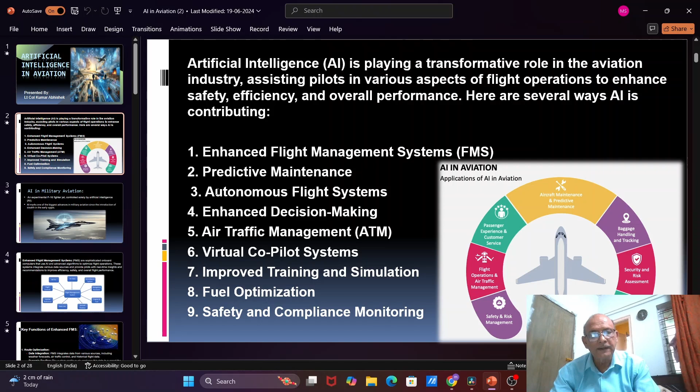Enhanced flight management systems, predictive maintenance, autonomous flight systems, enhanced decision making, air traffic management, virtual co-pilot systems, improved training and simulation, fuel optimization, safety and compliance monitoring.

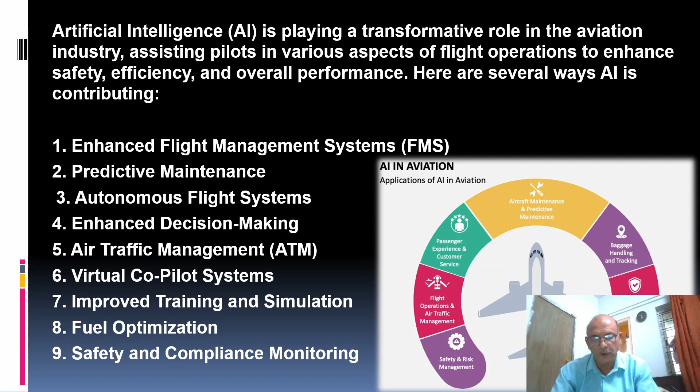AI in military aviation. An experimental F-16 fighter jet controlled solely by artificial intelligence. AI marks one of the biggest advances in military aviation since the introduction of stealth in the early 1990s.

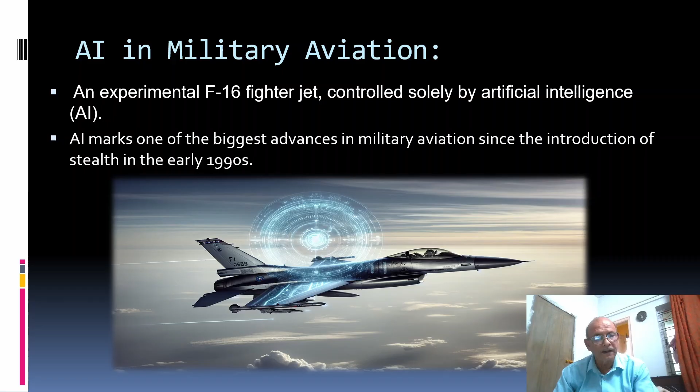Enhanced flight management systems are sophisticated onboard computers that use AI and advanced algorithms to optimize flight operations. These systems integrate various data sources and provide pilots with real-time insights and recommendations to improve efficiency, safety, and overall flight performance.

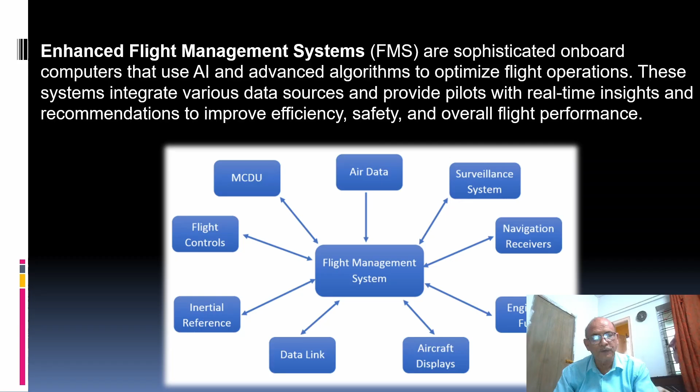Key functions of enhanced FMS: route optimization, data integration. FMS integrate data from various sources including weather forecast, air traffic control, and historical flight data. Dynamic routing: the system continuously analyzes this data to suggest the most efficient flight path, adjusting to factors like wind patterns, turbulence, and air traffic.

If a storm develops along the planned route, the FMS can suggest an alternative path that avoids the adverse weather, ensuring a smoother and safer flight.

Fuel management, consumption analysis. FMS monitors fuel usage in real time and compares it with expected consumption. Optimization: it suggests optimal speeds, altitudes, and configurations to minimize fuel burn.

For example, during a long haul flight, the FMS might recommend a slight altitude change to take advantage of favorable jet streams, reducing fuel consumption. Performance monitoring.

System health: FMS continuously monitors the performance of aircraft systems and components. Predictive alerts: it provides predictive maintenance alerts if it detects any anomalies or potential issues. If the system detects unusual engine vibrations, it can alert the crew and suggest a maintenance check upon landing, preventing potential in-flight failures.

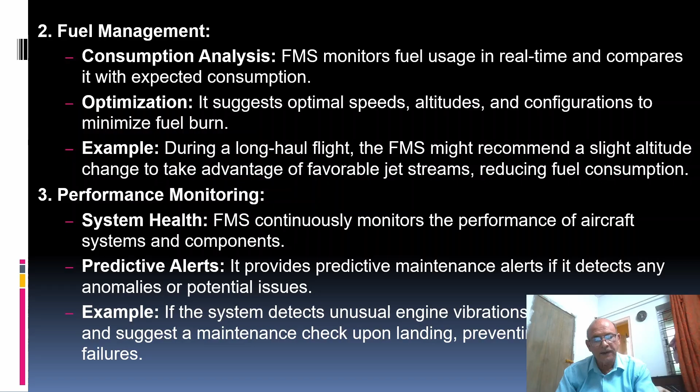Navigation. Accurate positioning: enhanced FMS can use GPS and other navigation aids to provide precise positioning and navigation guidance. Terrain awareness: it includes terrain mapping and awareness functions to help pilots avoid obstacles. For example, in mountainous regions, the FMS can provide visual and audio alerts if the aircraft gets too close to the terrain, helping to prevent controlled flight into terrain incidents.

Communication data link. FMS facilitates communication between the aircraft and ground stations, sharing flight data and receiving updates. Automation: it can automate certain communications such as position reports, reducing pilot workload.

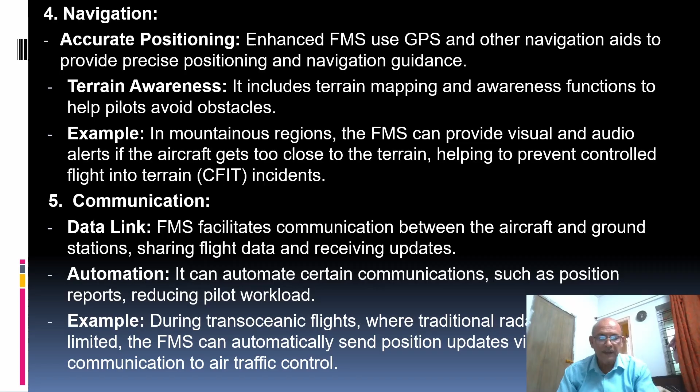During transoceanic flights where traditional radar coverage is limited, the FMS can automatically send position updates via satellite communication to air traffic control.

Example scenario: transatlantic flight optimization. Imagine an airline operating a transatlantic flight from New York to London. Here is how an enhanced FMS would optimize this flight.

Pre-flight planning. The FMS assesses the latest weather data, including forecasts for the North Atlantic, and integrates this with historical data on winds and jet streams. It suggests an optimal route that maximizes tailwind benefits, potentially reducing flight time by leveraging the strongest jet streams.

In-flight adjustment. During the flight, the FMS continuously monitors weather patterns and air traffic. If it detects that the planned route will encounter turbulence or significant headwinds, it suggests a new path. The system advises the pilots to adjust their altitude to avoid turbulence and maintain fuel efficiency, for instance climbing to a higher altitude where the air is smoother and the winds are more favorable.

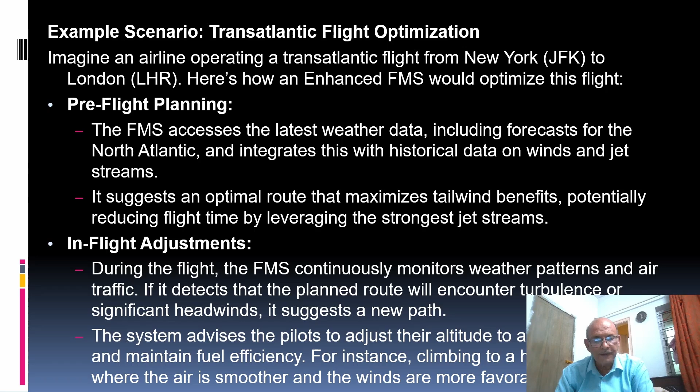Fuel management. The FMS tracks real-time fuel consumption and compares it with expected usage. If it detects higher than expected fuel burn, it recommends adjustments in speed or altitude. It also provides real-time updates on remaining fuel, ensuring that the aircraft remains within safe operational limits and can make any necessary adjustments to reach the destination or an alternate airport.

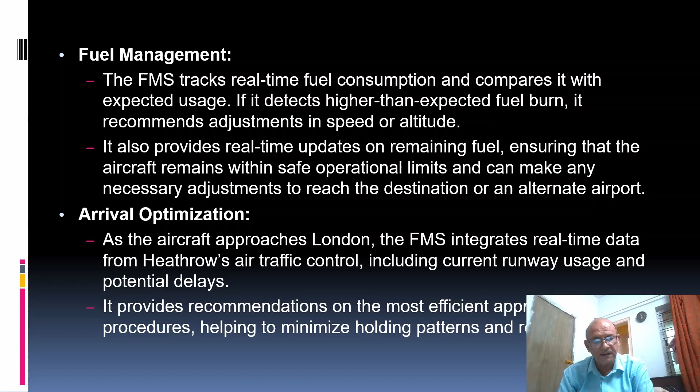Arrival optimization. As the aircraft approaches London, the FMS integrates real-time data from Heathrow air traffic control, including current runway usage and potential delays. It provides recommendations on the most efficient approach and landing procedure, helping to minimize holding patterns and reduce delays.

Efficiency: by optimizing routes and fuel management, the enhanced FMS reduces operating cost and environmental impact. Safety: continuous monitoring and real-time adjustment enhance flight safety, reducing the risk of incidents. Pilot workload: automating routine tasks and providing timely recommendations allows pilots to focus on critical decision making.

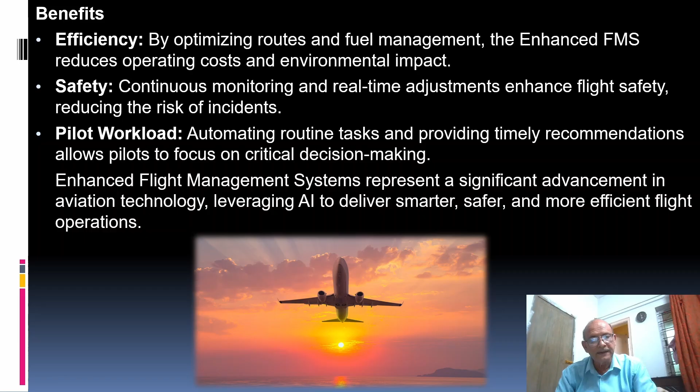Enhanced flight management systems represent a significant advancement in aviation technology, leveraging AI to deliver smarter, safer, and more efficient flight operations.

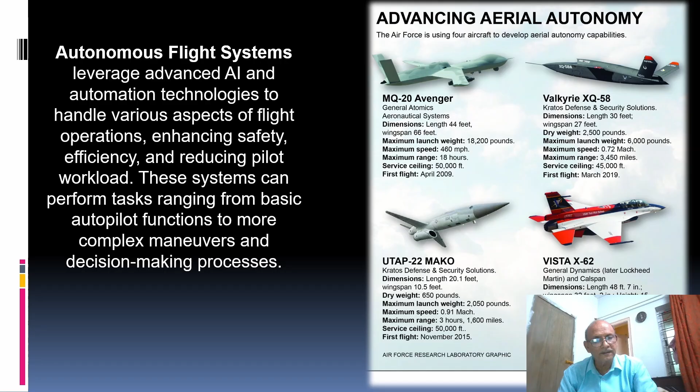Autonomous flight systems leverage advanced AI and automation technologies to handle various aspects of flight operation, enhancing safety, efficiency, and reducing pilot workload. These systems can perform tasks ranging from basic autopilot functions to more complex maneuvers and decision-making processes.

Key components and functions of autonomous flight systems. Autopilot enhancements. Basic functions: traditional autopilots control the aircraft's heading, altitude and speed. Enhanced systems use AI to improve these functions with greater precision. Advanced control: AI algorithms manage complex flight dynamics, including turbulence mitigation, optimal climb descent profiles, and smooth navigation around obstacles.

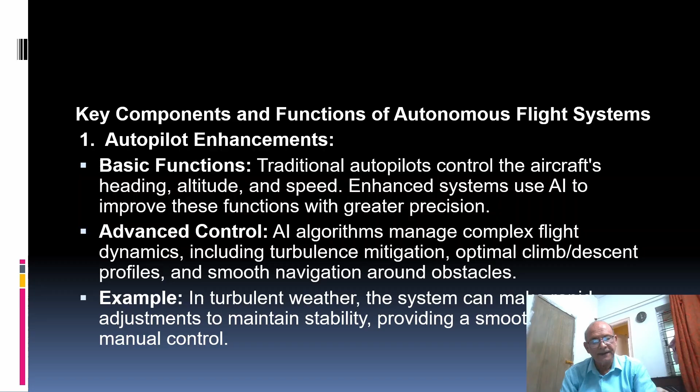For example, in turbulent weather, the system can make rapid adjustments to maintain stability, providing a smoother ride than manual control.

Autonomous navigation and path planning. AI analyzes real-time data to plot optimal flight paths, avoiding hazards such as weather disturbances, restricted airspace, and traffic congestion. Dynamic rerouting: during the flight, the system can autonomously reroute the aircraft based on changing conditions. If a storm develops along the flight path, the system autonomously calculates an alternative route, minimizing disruption and maintaining safety.

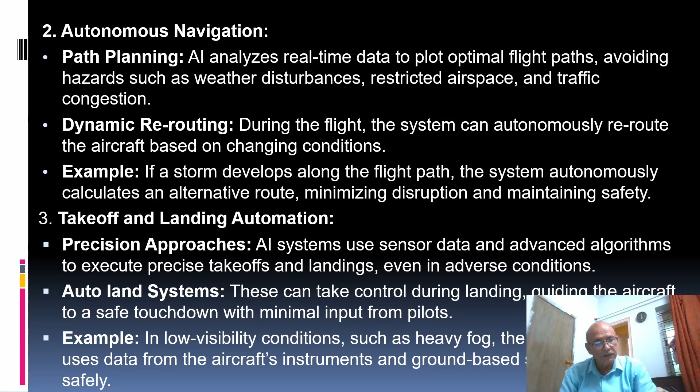Takeoff and landing automation: precision approaches. AI systems use sensor data and advanced algorithms to execute precise takeoffs and landings even in adverse conditions. Auto land systems can also control landing, guiding the aircraft to a safe touchdown with minimum input from pilots. In low visibility conditions such as heavy fog, the auto land system uses data from aircraft instruments and ground-based systems to land safely.

Emergency handling and incident response: AI systems are programmed to handle in-flight emergencies from engine failure to cabin depressurization. Decision support: they provide recommendations to pilots or can take autonomous actions if pilots are incapacitated. For example, if one engine fails, the system can balance the aircraft, adjust flight parameters, and guide it to the nearest suitable airport for an emergency landing.

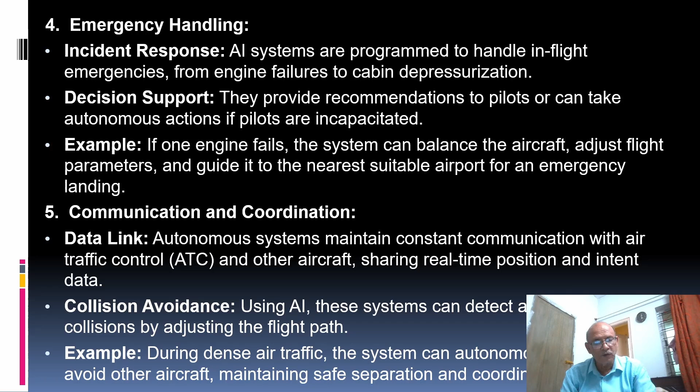Communication and coordination: data link. Autonomous systems maintain constant communication with air traffic control and other aircraft, sharing real-time position and intent data. Collision avoidance: using AI, these systems can detect and avoid potential collisions by adjusting the flight path. For example, during dense air traffic, the system can autonomously navigate to avoid other aircraft, maintaining safe separation and coordinating with ATC.

Example scenario: autonomous flight from Los Angeles to San Francisco. Imagine an airline operating a short domestic flight from Los Angeles International Airport to San Francisco International Airport. Here is how autonomous flight systems enhance this operation.

Pre-flight preparation: the autonomous system performs a comprehensive pre-flight check, analyzing weather forecast, flight plans, and aircraft systems, ensuring all systems are functioning correctly and the flight path is optimized for current conditions. Takeoff: once cleared by ATC, the system handles the takeoff roll, monitors engine performance, and adjusts control surfaces for optimal liftoff, ensuring a smooth climb while maintaining the safest and most efficient ascent profile.

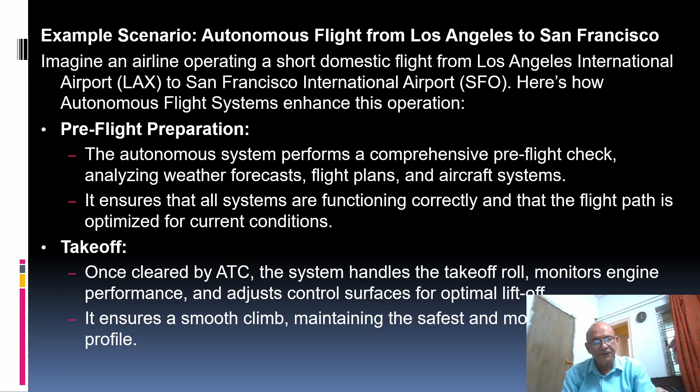En-route navigation: during the flight, the autonomous system continuously monitors air traffic, weather conditions, and aircraft performance. If it detects turbulence ahead, it adjusts altitude to find smoother air, and can reroute the flight path if unexpected weather changes occur. Mid-flight, the system detects a developing storm cell along the planned route. It calculates an alternative path, informs ATC of the new route, and adjusts the aircraft trajectory to avoid the storm, ensuring passenger comfort and safety.

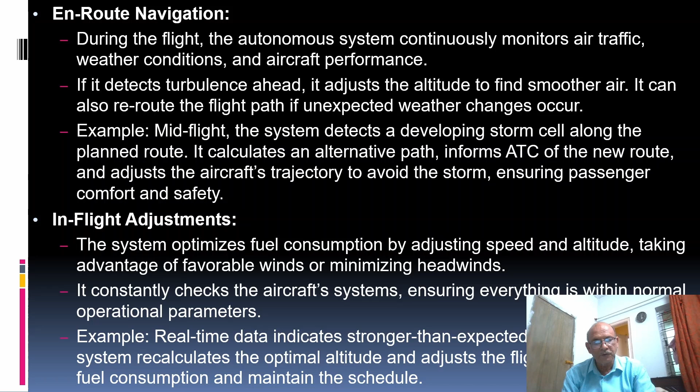In-flight adjustment: the system optimizes fuel consumption by adjusting speed and altitude, taking advantage of favorable winds or minimizing headwinds. It constantly checks aircraft systems to ensure everything is within normal operational parameters. When real-time data indicates stronger than expected headwinds, the system recalculates the optimal altitude and adjusts the flight level to reduce fuel consumption and maintain the schedule.

Descent and landing: as the aircraft approaches SFO, the system coordinates with ATC to receive landing clearance and final approach instructions. It calculates the most efficient descent profile, reducing fuel burn and noise pollution. During the final approach, the auto land system engages, using high precision navigation aids to guide the aircraft to a safe landing even if visibility is poor due to fog or rain.

For example, during descent, the system encounters unexpected low visibility due to fog. It seamlessly transitions to auto land mode, using on-board instruments and ground signals to execute a precise landing.

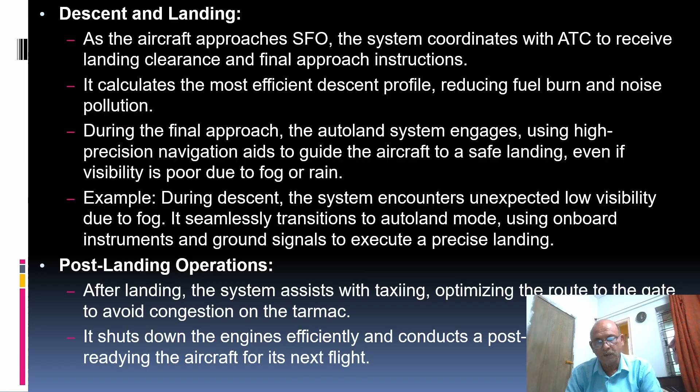Post-landing operations: after landing, the system assists with taxiing, optimizing the route to the gate to avoid congestion on the tarmac. It shuts down the engines efficiently and conducts a post-flight system check, readying the aircraft for its next flight. Benefits of autonomous flight systems include enhanced safety, efficiency, and consistency.

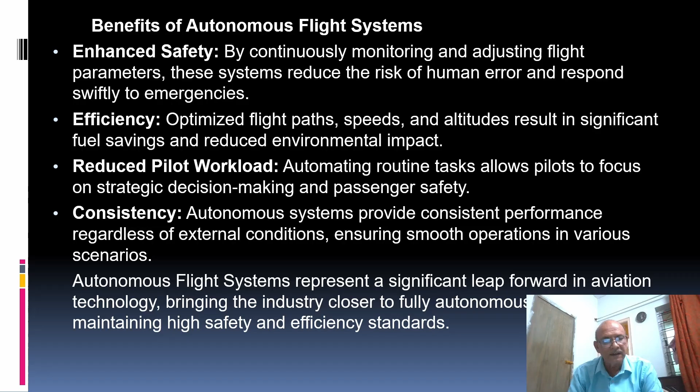Autonomous virtual co-pilot systems are advanced AI-driven assistants that support human pilots by automating routine tasks, providing decision-making assistance, and enhancing situational awareness. These systems leverage AI, machine learning, and data integration to improve flight safety, efficiency, and pilot workload management.

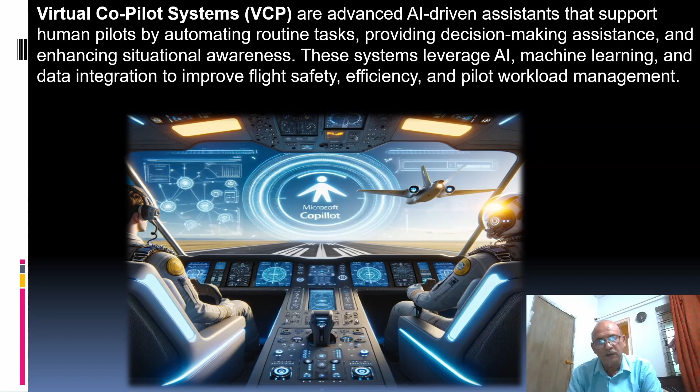Key components and functions of the virtual copilot system: automated monitoring and alert systems. Health monitoring: the VCP continuously monitors aircraft systems and performance metrics, providing real-time alerts about anomalies or potential issues. Flight path monitoring and decision support: data analysis analyzes weather conditions, air traffic, and other environmental factors.

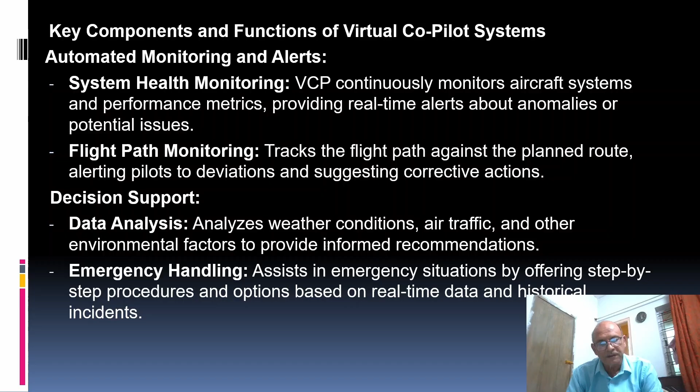Emergency handling assists in emergency situations by offering step-by-step procedures and options based on real-time data and historical incidents. Routine task automation includes checklists and enhanced navigation and landing assistance.

Scenario: a domestic flight from Delhi to Leh. Consider an airline operating a domestic flight from Indira Gandhi International Airport in Delhi to Kushok Bakula Rimpochee Airport in Leh. This route presents unique challenges such as high altitude flying, complex terrain, and variable weather conditions.

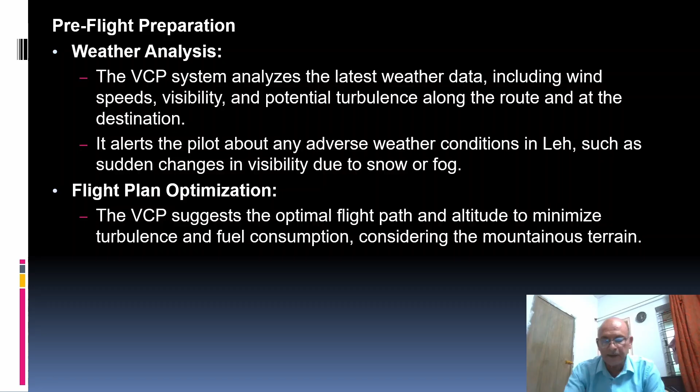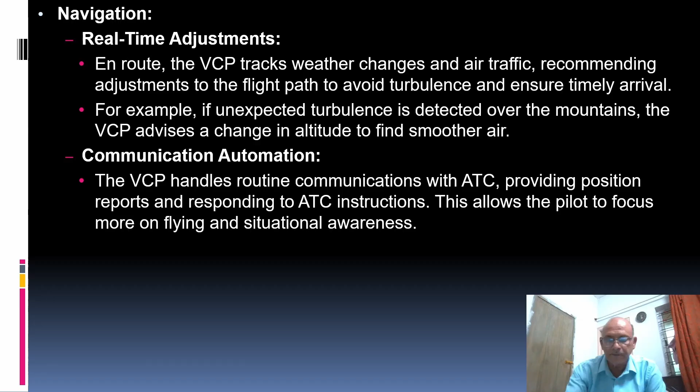Pre-flight preparation involves weather analysis and flight plan optimization. In-flight operations cover climb and cruise, terrain awareness, and fuel management, along with navigation, real-time adjustments, and communication automation. Descent and landing include low visibility landing procedures, followed by post-landing operations and checklist automation.

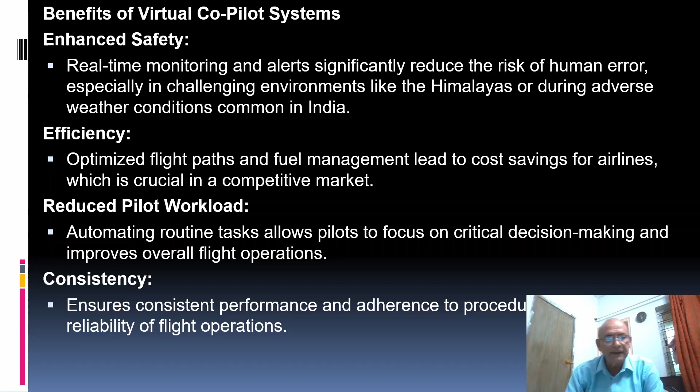Benefits of virtual co-pilot systems include enhanced safety, efficiency, reduced pilot workload, and consistency. Thank you. This is all about AI serving the aviation industry. Thank you.